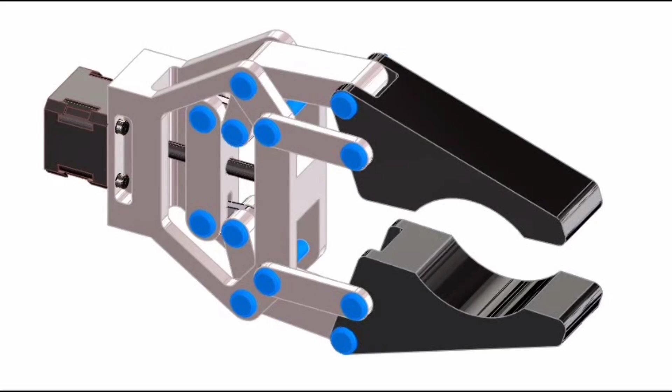So let's begin with the rocker. Open a new part file, ensure that you're working in millimeters as units, so select mmgs as units. Select the front plane and click on sketch.

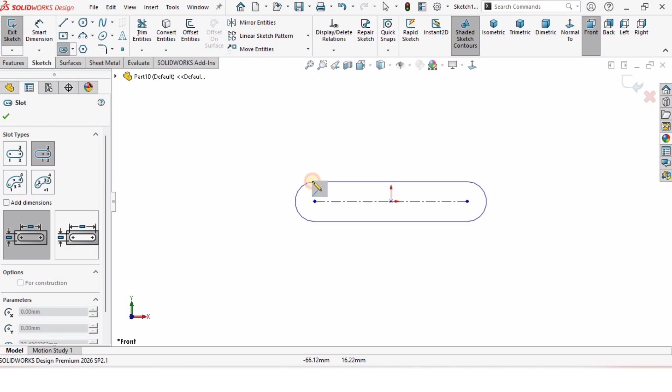Select this center point straight slot and create a slot here horizontally. To make sure that this is horizontal, select this line and assign a horizontal relation. Then select smart dimensioning tool and specify the length of this line, 20 millimeters.

Specify the radius of this arc, 7.5. Then select this circle and create two circles here. Then specify the diameter of one circle.

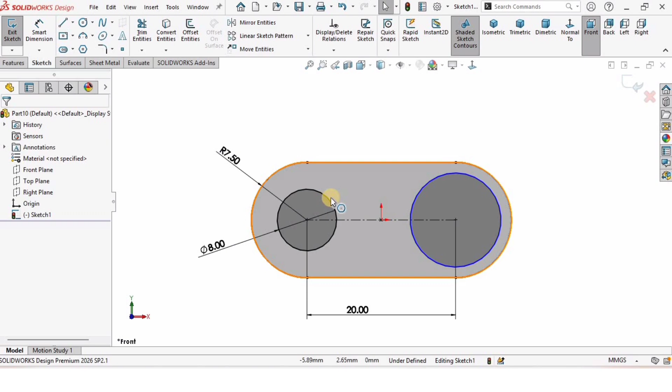So this is going to be it. Press escape. Hold control key, select both of these circles and make relation equal so that the other circle has the same diameter. As you can see, the sketch is turned fully black, and this is fully defined.

Go to features, select extruded boss base, and specify the depth of extrusion, which is 5. It's good practice for some sketches to select mid plane. Check the box, and this is our rocker part. You can specify any appearance you like.

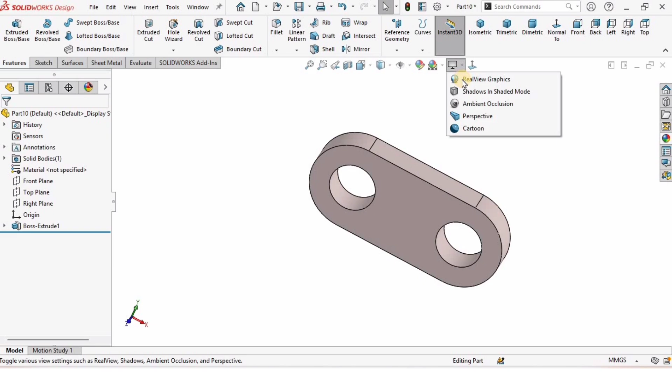Now let me save this part, and then we will move on to the jaw. Go to file, click on save as, and save this as rocker in the robotic gripper folder.

I will close this window and open a new part file. Click OK. Make sure that you're working in millimeters as units. This is going to be a little bit complex part, guys.

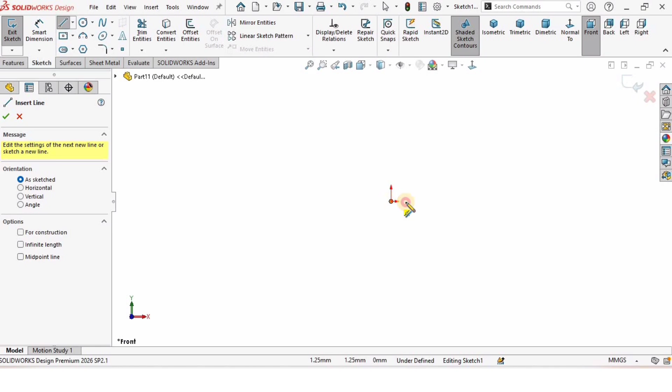I will create a sketch on the front plane and create a horizontal line. Select this line, make relation horizontal. Then select smart dimensioning tool and specify the length of this line, 31.64. It's better to specify the lengths quickly.

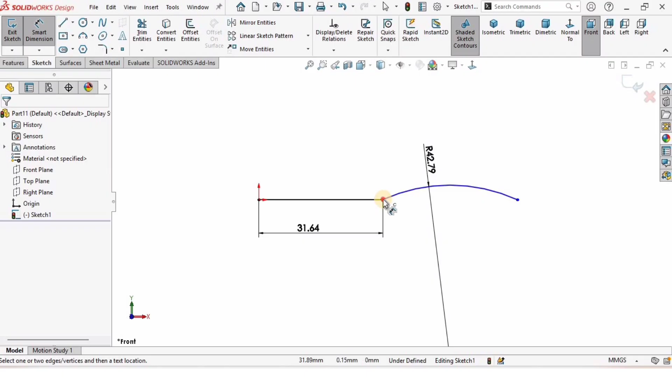Here you need to create a 3-point arc, then hold control key and select these two points and make relation horizontal. Select the smart dimensioning tool again, specify the radius of the arc, 42.79, and then specify this horizontal length, 62.91.

Select the line and create a horizontal line, an inclined line, and another inclined line like this. After creating this much sketch, go to smart dimensioning tool and specify the length of this line, 25.84.

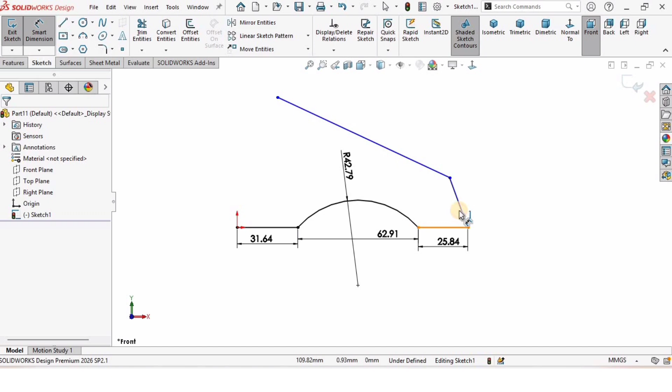Then select these two lines and assign the angle between these, 75.07. After that, select the line and assign the dimension along the line.

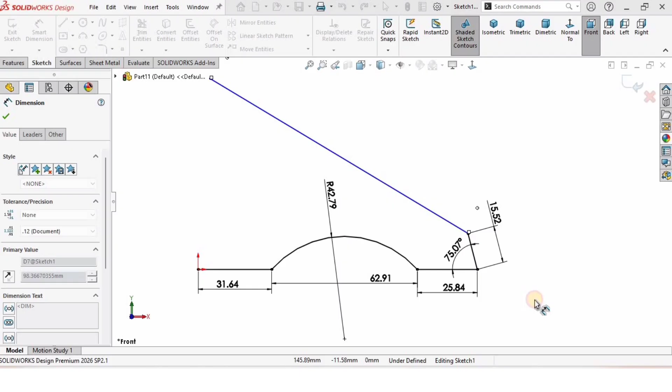So this is going to be 15.52, and very similarly you can specify the length of this line in this fashion, 128.47. Then select this line and specify this angle outward.

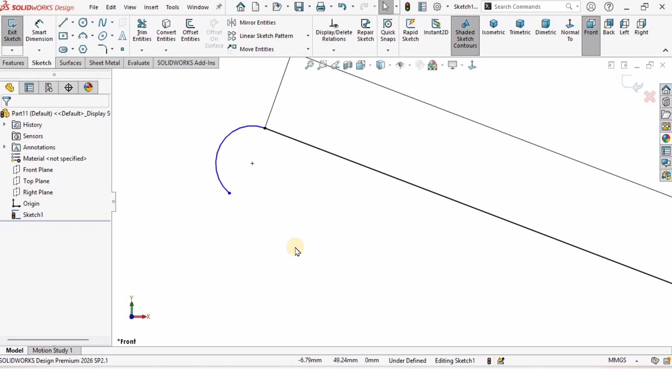So this is going to be 234.86. After that, I will select 3-point arc again and create a 3-point arc here. Then select this point between the junction of the line and the arc and assign a tangent relation.

Then select the line and close the sketch like that. Once again select this junction between the arc and the line and assign a tangent relation. Then select smart dimension tool and specify the radius of this arc, 8 millimeters.

Then I will select the circle and create two circles, one at the midpoint of the arc and another one in space. I will specify the diameter of one circle, 8 mm.

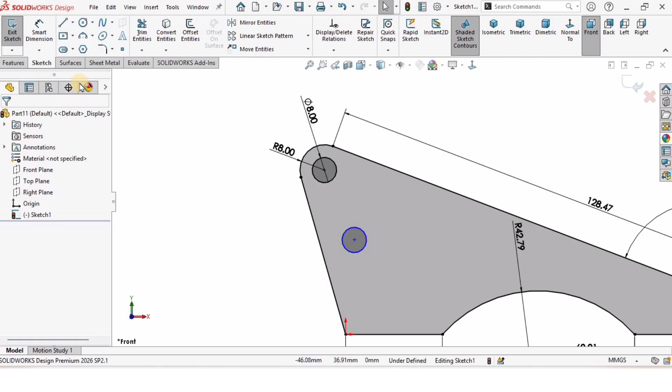Then hold control key, select both of these circles, and make relation equal. Again select smart dimensioning tool and specify the vertical distance between these two circles, 24.87.

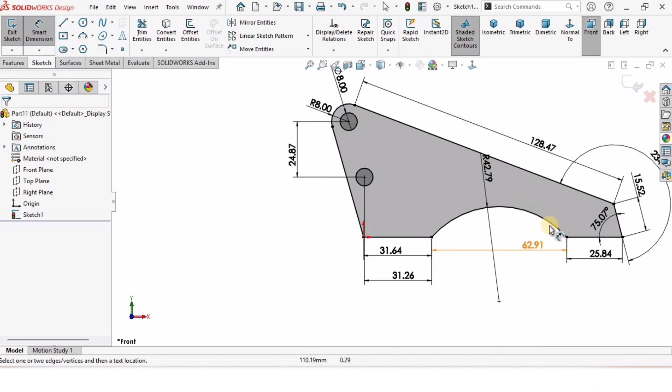Then select the midpoint of this and this point and specify the horizontal distance here to fully define it, 31.26. As you can see, the sketch is fully defined. It has completely turned black, nothing is blue.

So you can go to features and select extruded boss base. This was the most complex sketch. Specify 40 mm, select mid plane, and then check the box.

Okay, so we are left with some more features. We want a plane, basically this oriented plane. In my case this is the top plane. I will select the top plane and click on sketch.

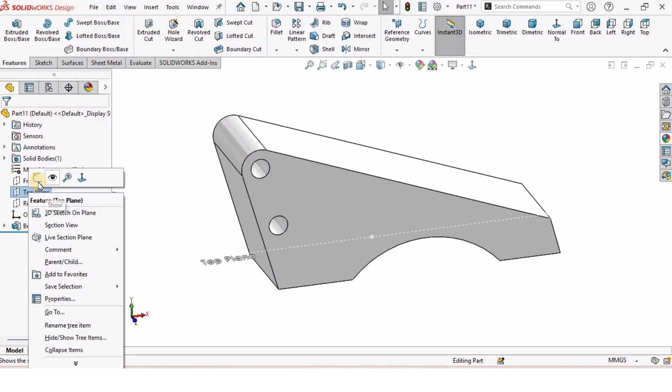I will select a reference center line, find this mid center point, and create a horizontal line here. This is not horizontal, so I will select this line and assign a horizontal relation to this. As you can see now, this is a perfect horizontal line.

Then I will select the center rectangle and create a center rectangle like that. Do not assign any relation to this rectangle. Let's specify the dimensions, so 25 by 25 millimeters.

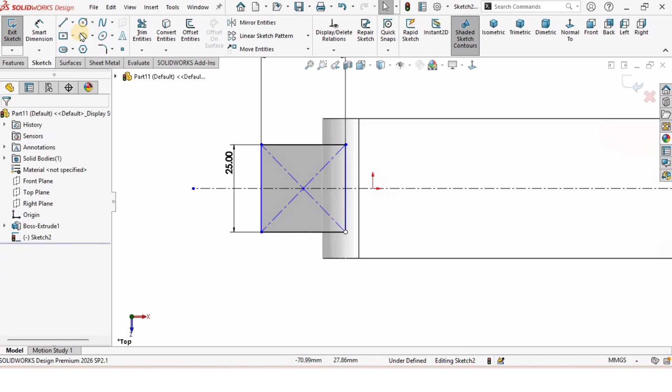Then press escape button, and do not link this to any of the entities. Then you need to select this edge - it's a little bit hard to select. From this edge to this line, I will specify the distance, 23 millimeters.

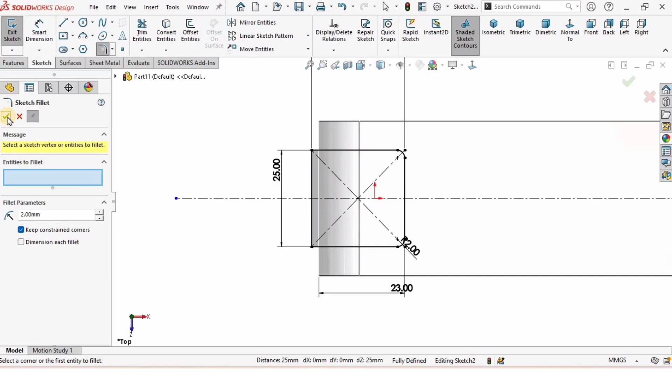Then I will select the sketch fillet from here and specify the radius, 2 millimeter, and only we would require the inner side, although you can select the other two sides as well, which are not really required.

Go to features and select extrude cut, and here you need to select through all both so that we can have this cut on both directions, and then check the box.

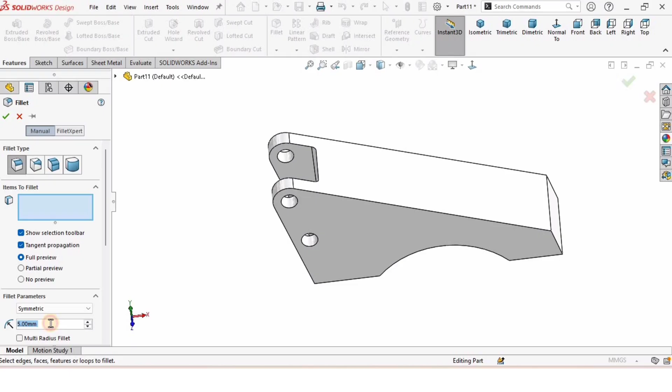Now I will select the fillet and specify here the radius, 5. Then I will select these two edges, and this edge and this one, and then check the box.

Okay, now this jaw is complete. You can now assign any color, any material to this - it's up to you. And that completes this jaw part as well.